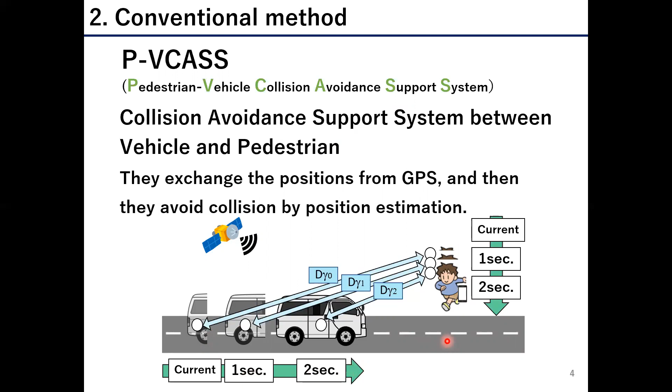The feature of P-VCASS is as follows. P-VCASS has an advantage that it is possible to predict invisible danger, not only around the vehicle but also on the other side of a wall, since it is judged by radio waves.

However, this system cannot adapt to pedestrians who suddenly run out onto the road in traffic conditions. In addition, we cannot judge accurately whether it is dangerous or safe. Since it is difficult to accurately divide between safe and dangerous, we consider a system that incorporates human subjective senses.

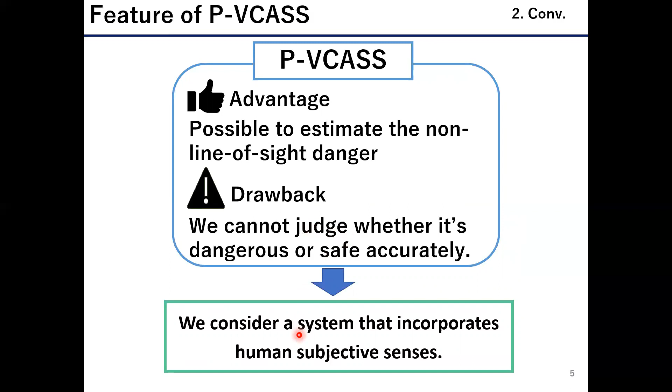I explain the proposed method. The risk of danger is calculated from the GPS information of vehicles and pedestrians. As I mentioned in the previous slide, for incorporating human subjective senses, we consider fuzzy logic to be one of the effective means. We use fuzzy reasoning for the calculation of this risk. The objective is warning according to the traffic situation, making the driver instantly aware of the danger.

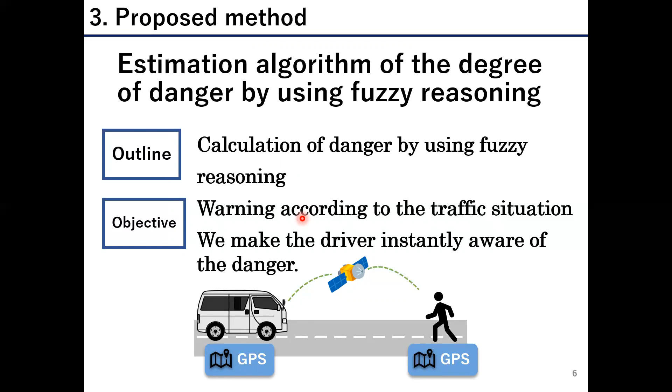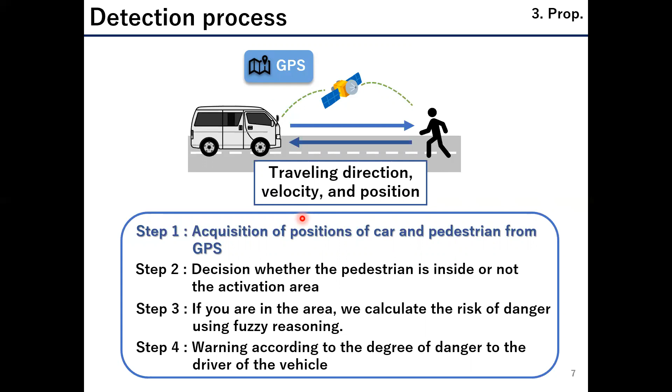This slide shows the detection process from step 1 to step 4. In step 1, positions of car and pedestrian are acquired from GPS. The acquired information is exchanged periodically by vehicle-to-pedestrian communications.

In step 2, the decision is whether the pedestrian is inside or not the activation area. This blue area is the activation area; we detect pedestrians in this blue area. The size of this area is determined by D front minimum and D front max, and this area is shaped like a donut. Simply, the higher the vehicle speed, the larger this area.

The D front minimum and D front maximum are calculated by these equations. We refer to the document shown below.

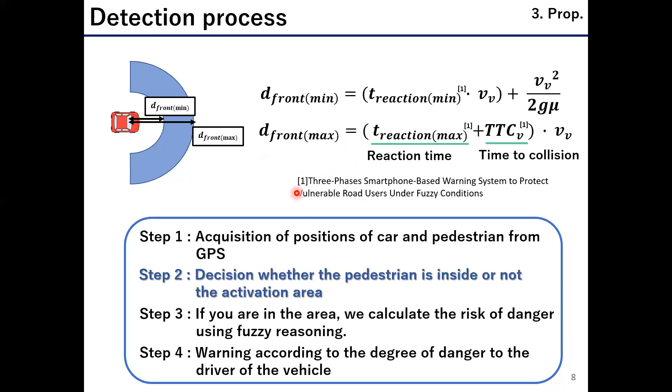We use a fuzzy logic function with 3 inputs and 1 output. From GPS information, 3 data points such as TTC (time to collision), acceleration of vehicle, and acceleration of pedestrian are calculated. After that, fuzzy operation is performed, and then we calculate the risk of danger.

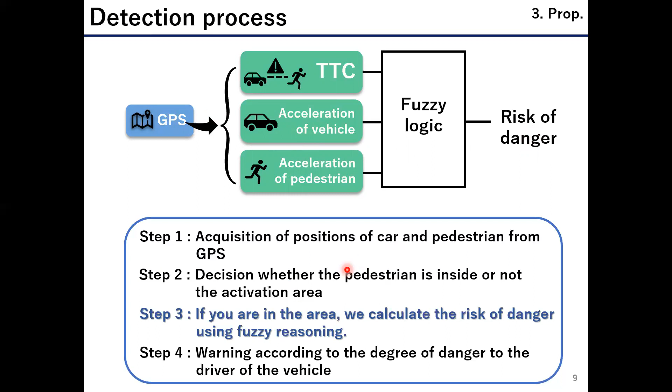We show the rule table and membership functions required for fuzzy operations. This membership function is from TTC as an example.

We set 18 rules, inputting TTC, acceleration, and output risk of danger as lower, higher, keeping, deceleration, and acceleration. Output is low, average, and high. We set other membership functions for acceleration of vehicle and acceleration of pedestrian.

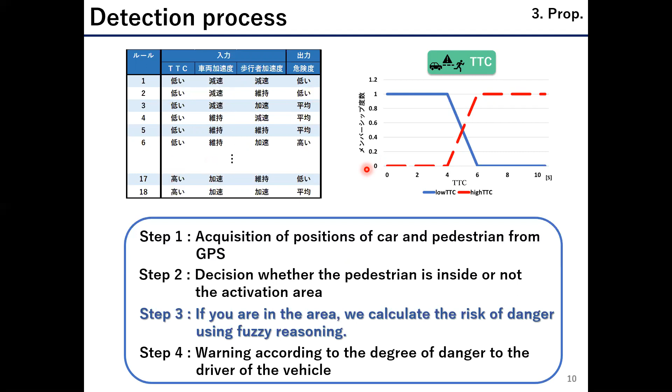Low risk and high risk warnings are given in 2 stages. Low risk warning is a warning that calls attention to others; if the risk exceeds 30%, it will warn the driver with sound. High risk warning is a warning that prompts the driver to avoid by using the brakes or steering wheel immediately; if the risk exceeds 75%, it will warn the driver with sound and image.

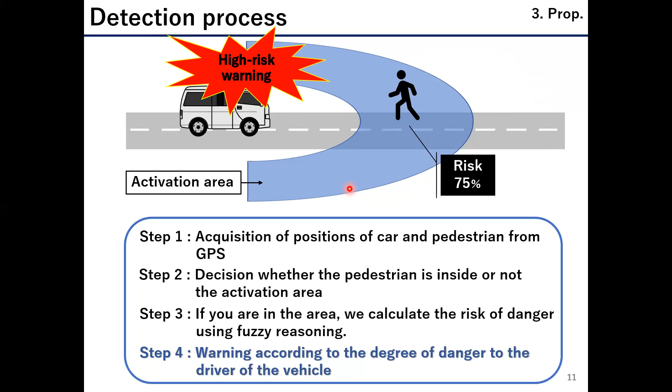In order to investigate the effectiveness of the proposed method, we carry out experiments of 2 mobility models, such as dangerous and safe situations. The dangerous state is walking for 10 seconds, and it is assumed that they approach each other towards the yellow place. It will be possible to be a collision.

The vehicle and pedestrian have GNSS receivers connected to a PC, and each mobility uses a Wi-SUN module as the wireless communication media, which can be used for outdoor wide area IoT wireless networks. The communication interval is 0.5 seconds, meaning the risk is calculated and updated every 0.5 seconds. The vehicle speed is average 20 to 30 km per hour. The number of trials is 21 times in each state.

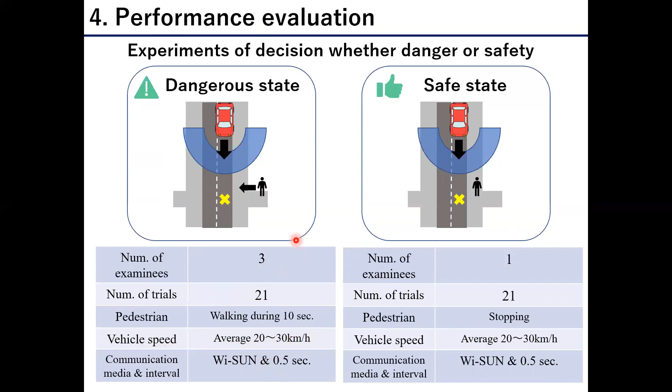This slide shows a figure in the dangerous state, an example of warning timing in a dangerous situation. The horizontal axis represents elapsed time from the start. The left vertical axis represents the distance, and the right vertical axis represents the risk of collision. The blue line is the relative distance between the vehicle and the pedestrian. The green line shows the stopping distance of the vehicle, and the red line shows the degree of danger.

Since there is a pedestrian in the activation area of the vehicle at 4.5 seconds, the risk is calculated. We set thresholds of 30% and 75% risk for low and high risk warnings, respectively. At 5.0 seconds, the risk is 30%.

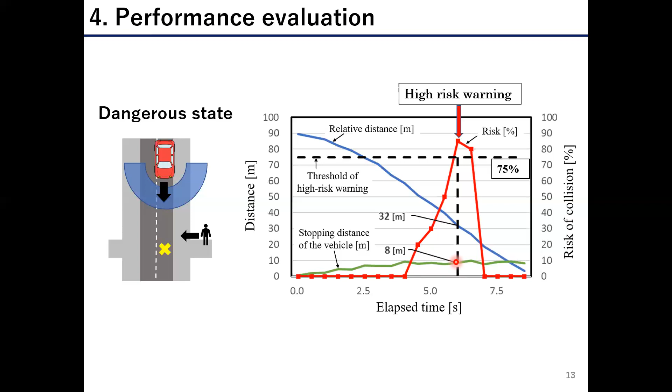On the other hand, here is a safe state environment, an example of an accurate warning in a safe state. The display of the figure, axis, and legend is the same as in the previous figure. From this figure, you can see that we are giving a low risk warning in this period instead of a high risk warning.

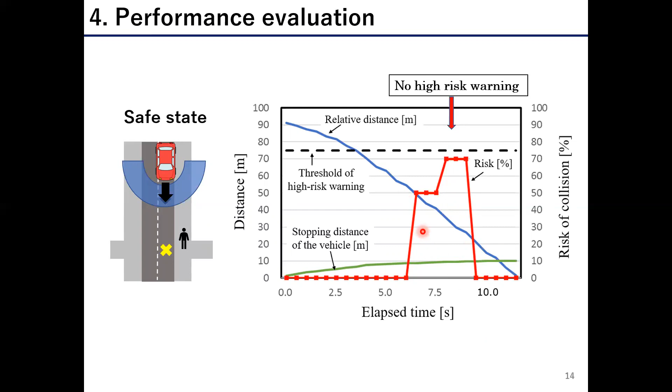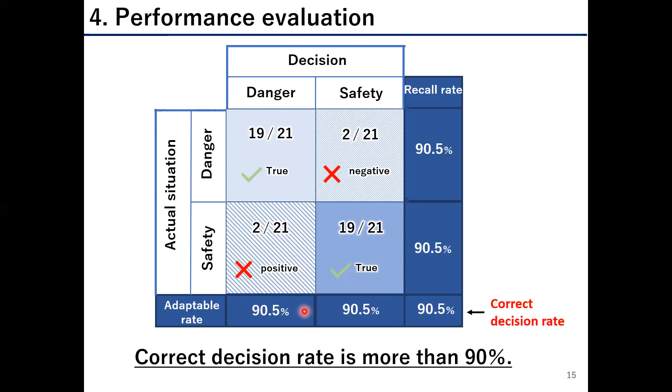The overall results are shown in this table. This is the recall rate, and this is the adaptable rate. The correct decision rate indicates the performance of the entire system. The frames with this cross mark are false warnings, and this mark is true warnings. False warnings were detected twice in each. However, it turned out that the correct decision rate is more than 90%.

So, in order to improve the warning error, we have to study the following two points. First, we have to reduce the communication interruption and error in a road environment by increasing RSSI. RSSI from the Wi-SUN module fluctuates according to time, so we need a stable environment. Second, we need to adjust the parameters that incorporate deep learning and so on in a simulation environment.

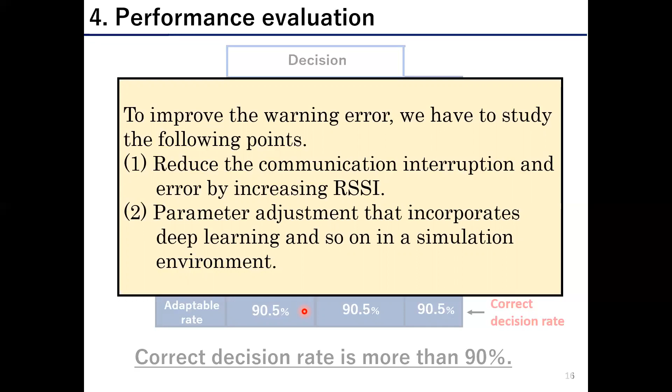Finally, I conclude my presentation. We focus on the high proportion of pedestrians in traffic fatal accidents. We clarify the problems of the pedestrian vehicle collision avoidance support system, PVCAS. In order to solve the problems, we have proposed a risk calculation algorithm using fuzzy logic. We have found the following results by experiments: first, visualization of risk level is possible by detecting pedestrians quickly; second, multi-step high, middle, low warnings are possible at an appropriate timing.

In future works, we have to improve the wireless communication quality to increase the RSSI in a road environment, and we have to adjust the parameters that incorporate deep learning and so on. This is the end of my presentation. Thank you for your attention.